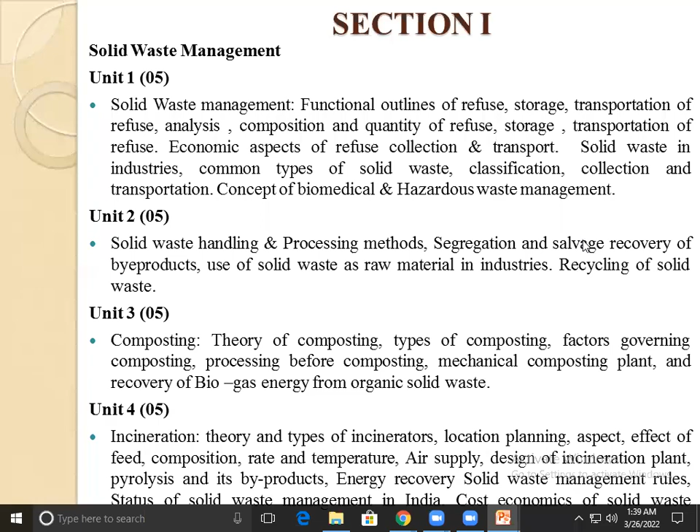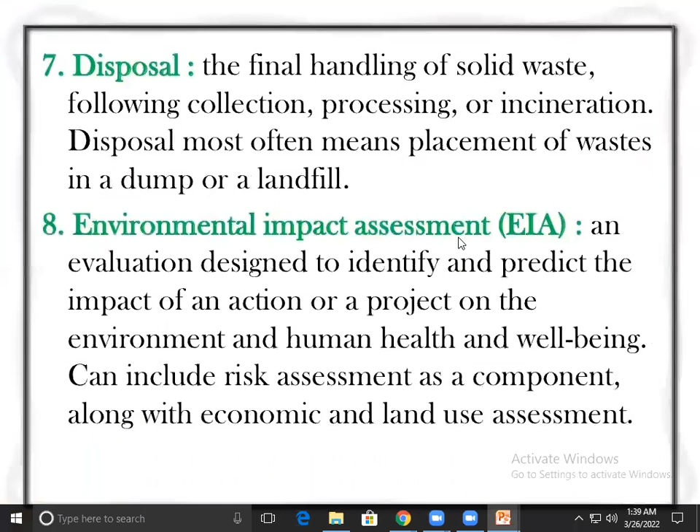In the previous lecture, we have seen the different collection methods and different factors affecting the methods of collection.

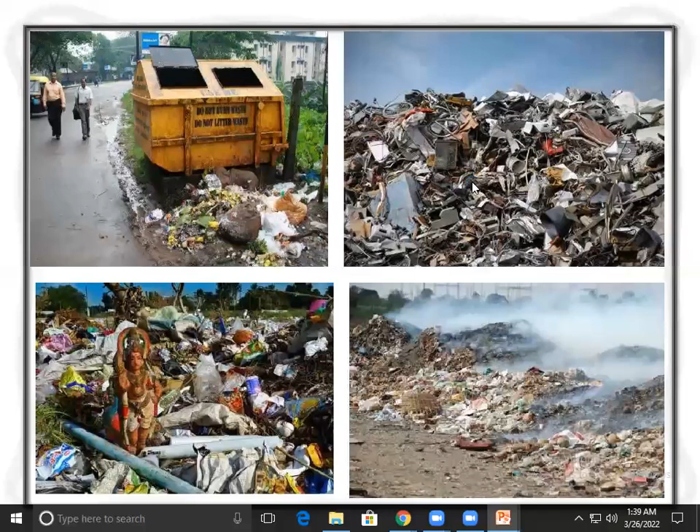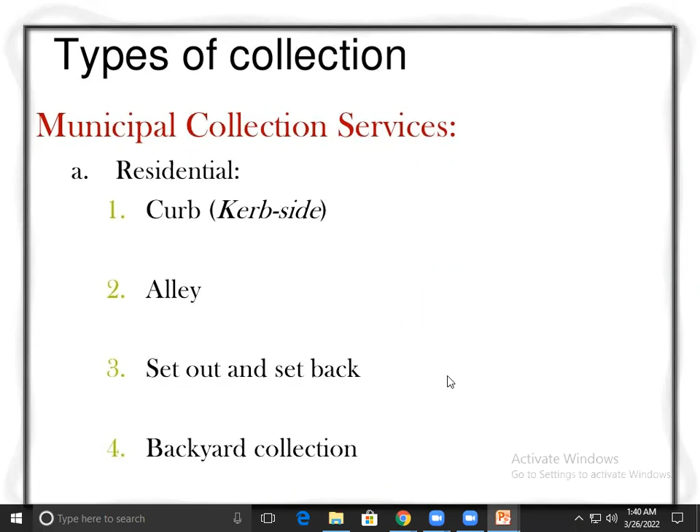Types of collection that include municipal collection services. In that, I have studied from the residential buildings how the solid waste is collected by different methods, near to the curb, alley line, set out and set back, backyard collection. These are the methods of collection in residential buildings, in commercial buildings and industrial buildings where waste is collected

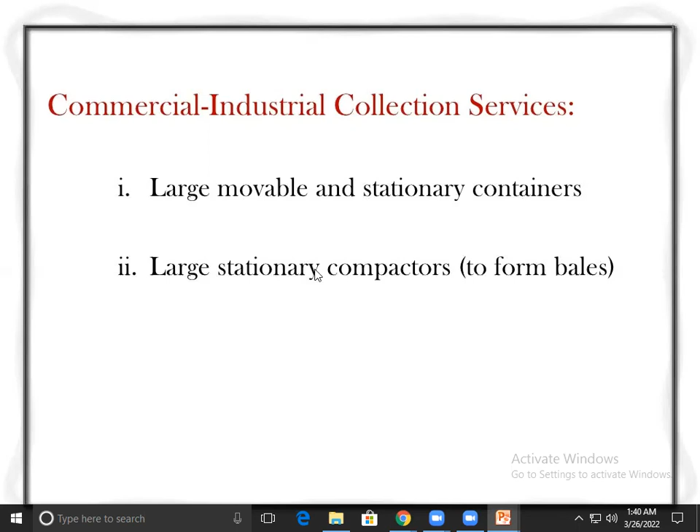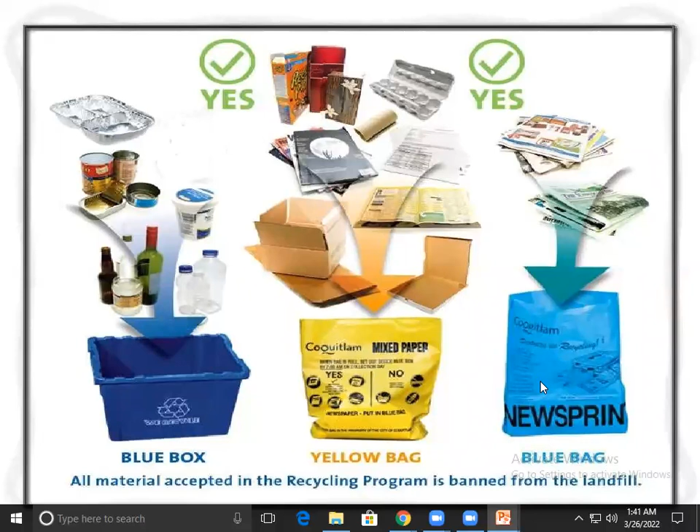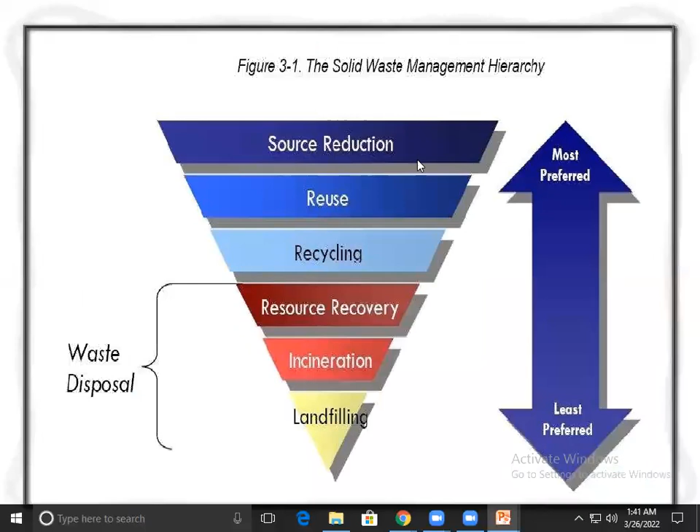In composting method, we have seen these three methods: composting by trenching, open windrow composting, mechanical composting.

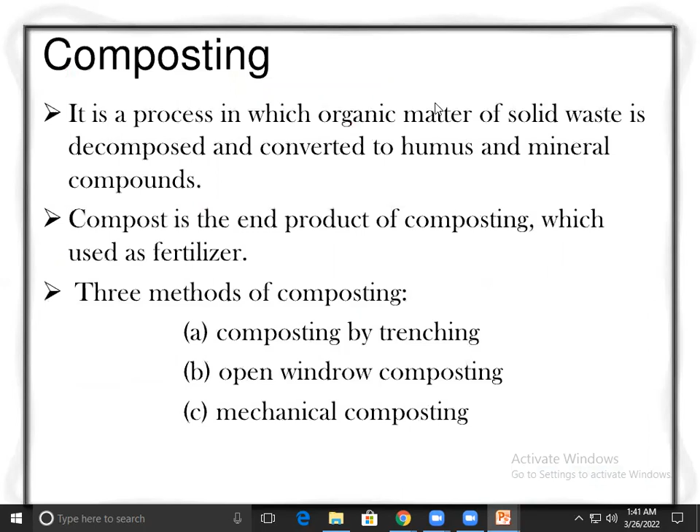Now second method is incineration. The treatment and disposal of solid waste includes composting, incineration, landfilling, pyrolysis, and recycling.

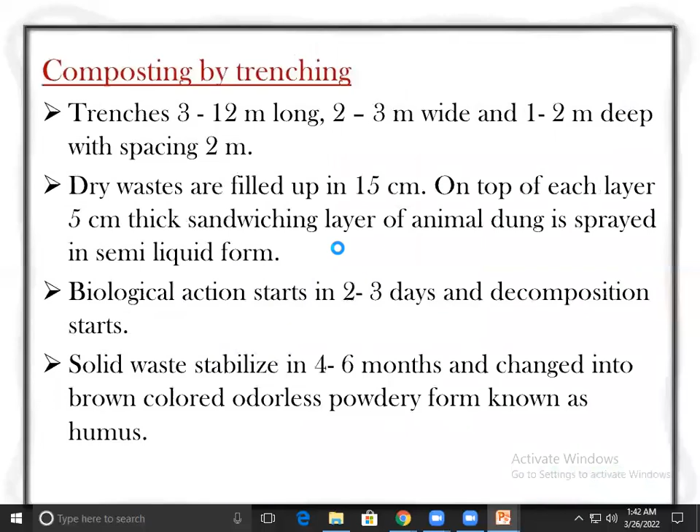We have seen composting. Now, incineration method. What does incineration mean? It means burning. Combustion - this process includes combustion of the organic substances, the organic waste which are generated from the residential houses and industrial buildings. That organic substance is burned into the incinerator.

Incinerator is used for this process, in which burning is done. Waste is burned into the incinerator. What is an incinerator? The equipment in which waste is burned into that chamber - that equipment which is used is called an incinerator.

Incineration of the waste material - that is converted into ash after burning. What it forms, the final product, is ash, flue gas, and heat. Steam is generated. What do we call this? Thermal treatment, thermal power.

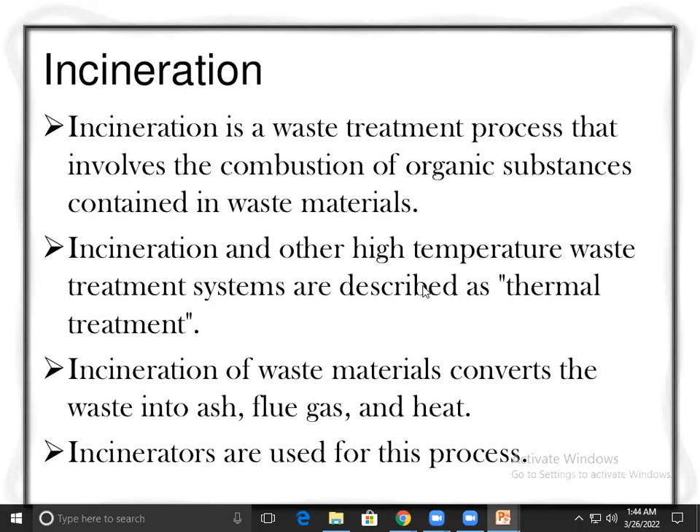Thermal means heat - heating treatment is given. At a high temperature, the waste is burned. This is the process of thermal treatment.

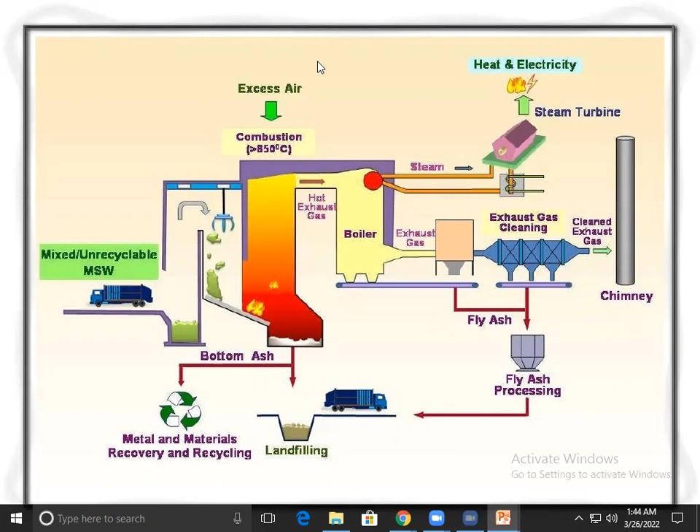This thermal treatment is for mixed and unrecyclable municipal solid waste which is dumped here. After dumping, the waste goes from here into this chamber.

Solid waste is collected in this combustion chamber. See, in green color, this waste is collected here. From here it is pushed into this chamber - the combustion chamber - in which the waste is heated at a temperature of more than 850 degrees Celsius.

Combustion is done with excess air. In this combustion chamber, heat is generated, as shown here. The temperature applied is kept above 850 degrees Celsius.

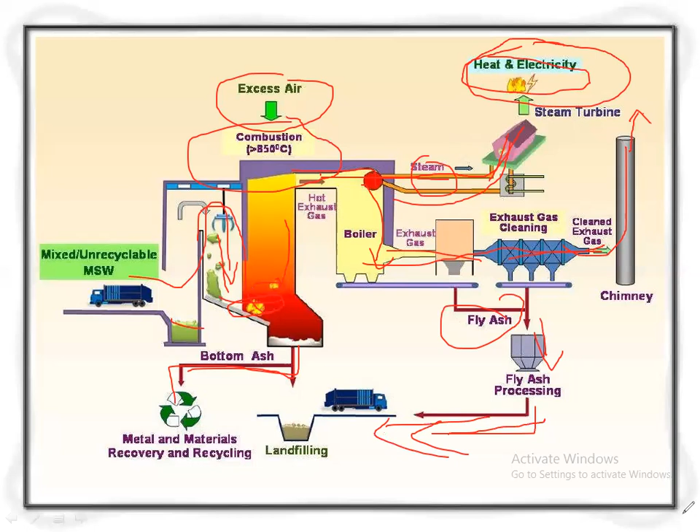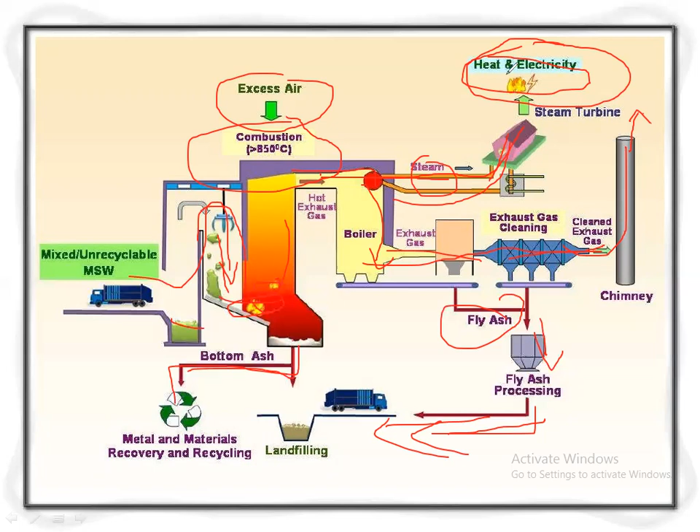Therefore, this incineration requires more units. Therefore, the initial cost will be more to install these machineries, equipment, and a large area is required. Therefore, it is costlier - a similar process, the incineration process.

What are the points considered in this incineration process? The solid waste should be supplied in the combustion chamber continuously, and the waste should be properly mixed with fuel for complete combustion.

It should be complete combustion. If it burns partially, what will happen? Air pollution will occur. It will mix with the air and release gases harmful to the environment and society. The temperature maintained should be above 850 degrees Celsius and should not be less than 670 degrees Celsius.

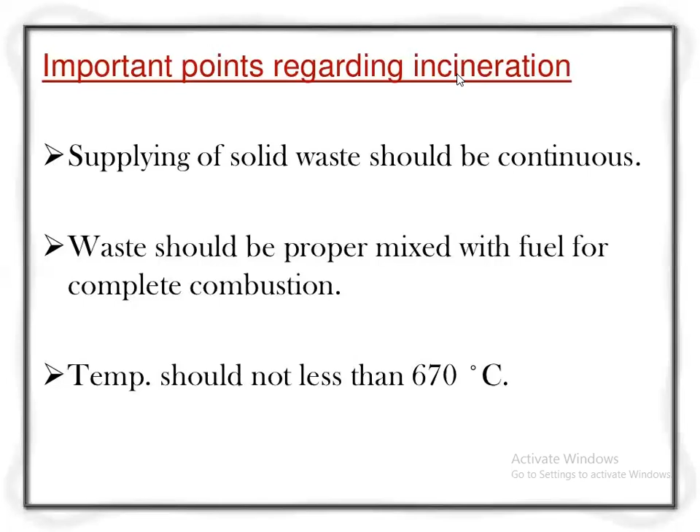What are the advantages in this? It is the most hygienic method. Why is it hygienic? Because all the waste is burned - whatever material is there, organic waste, combustible material, biodegradable, non-biodegradable, hazardous waste - it all completely burns. Whatever pathogenic bacteria are present get completely destroyed. Therefore, it improves the hygienic environment; hygienic conditions can be maintained.

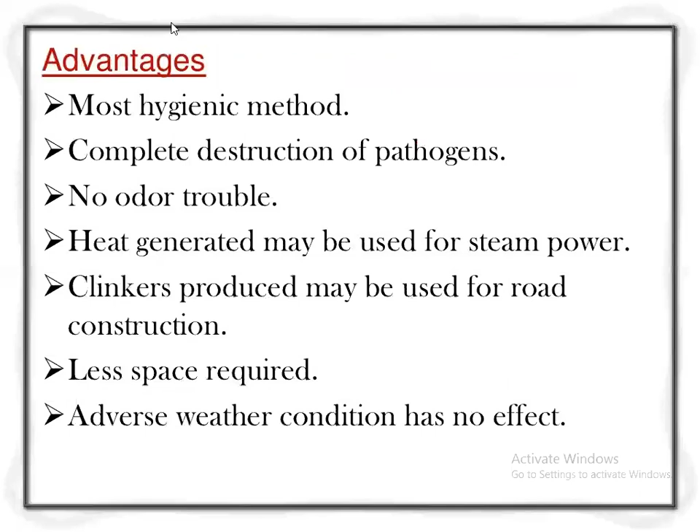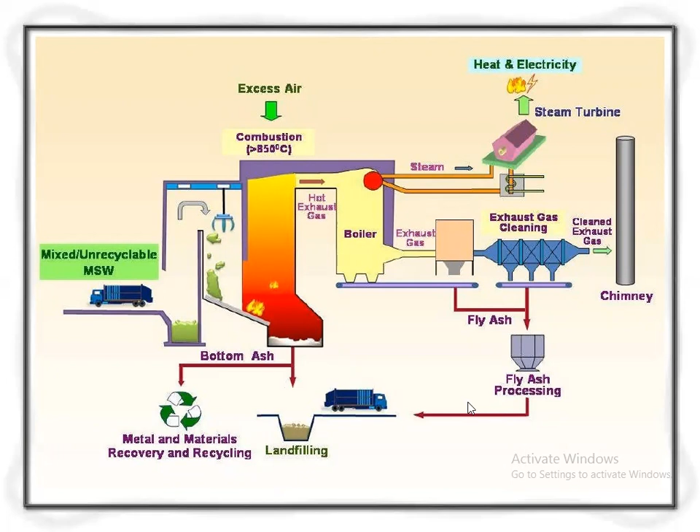Residue disposal is required, which requires money. The residues, as shown in the diagram - the fly ash residue needs to be carried, requiring transportation cost and vehicles, which will increase cost. Large numbers of vehicles are required for movement of the waste and fly ash, therefore transportation cost will increase. These are the disadvantages.

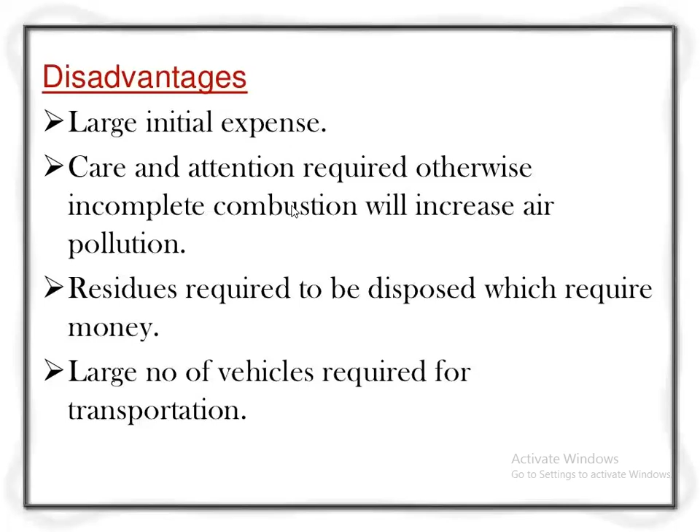This is one of the treatment methods - incineration. Did you understand the incineration method?

The next method is landfilling - one of the oldest methods, in which the waste is buried into the ground in trenches. Just like in composting, the waste is deposited layer by layer in trenches and then covered. In landfilling too, on the landfill site where the trench is, the trash, refuse, and garbage are dumped and laid in layers. In many countries all over the world, this oldest method of treatment is used.

Nowadays we use modern methods of treatment of waste. The dumping is done with layers of 1 to 2 meter depth. Each layer is covered with soil of 20 centimeter thickness - a soil layer is placed on top. Up to 1 to 2 meters, waste is dumped, then a soil layer is placed, and then solid waste is deposited again. It is laid in layers.

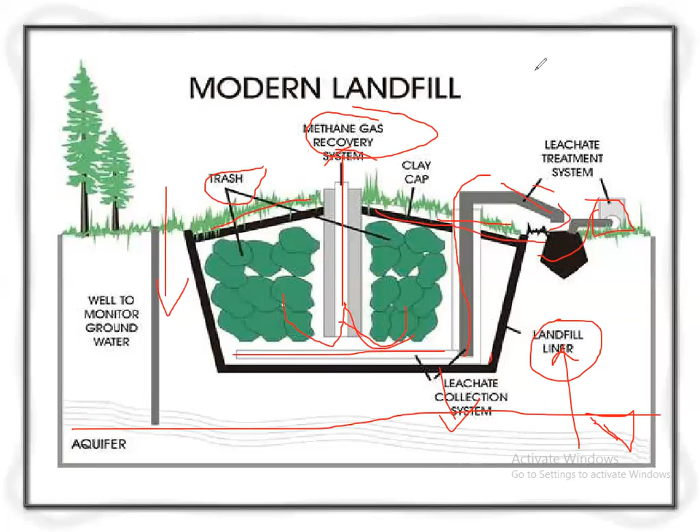What are the advantages of this landfilling method? The simple method than incineration. No costly plants are required. Only you have to excavate the trench. In that you have to place all these pipes, methane gas pipe, leachate system that you have to install, leachate treatment unit where you have to take.

No residues or byproducts need to be disposed. जसं incineration method मध्ये जे byproducts असतात, ash, that are need to be disposed of. त्यामध्ये कुठलेही रेसिड्यू जमा होत नाही, बाय प्रोडक्ट जमा होत नाही. Therefore it need not to be treated or disposed of.

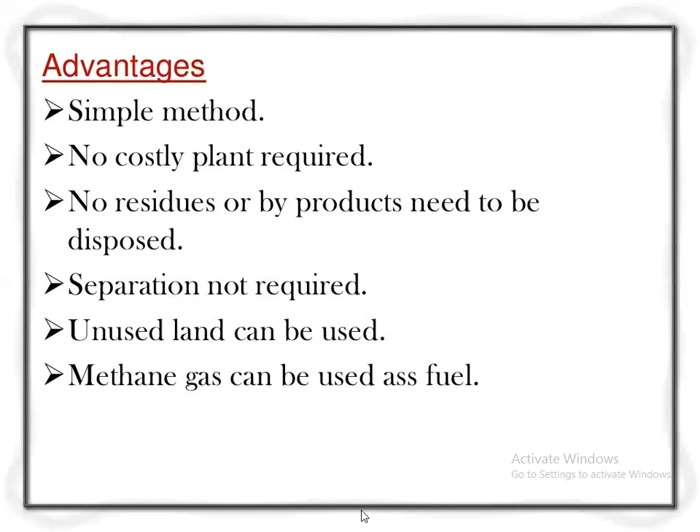Separation not required. Material separation है, solid waste it will not be separated. Separation is not required. Unused land can be used, जे unused land आहे, that can be used for the landfilling purpose. Methane gas can be used as fuel for cooking purpose. These are the advantages.

Disadvantages काय आहेत? Large land is required. सॉलिड वेस्ट डंप करण्यासाठी large area लागेल. Land area required will be large, and dumping site may not be available. जे डंप करण्यासाठी dumping site लागतात, so it will be available far from the villages or towns. Therefore transportation costs will increase. This is one of the disadvantage.

Odor problem will create. डम्पिंग केल्यानंतर त्यामध्ये मिथेन गॅस बाहेर पडतात, त्यामुळे it will spread in the society, in the nearby houses where landfilling is done. There will be chances of spreading diseases, spreading in the environment. It will pollute the air, air pollution may take place. Or due to leachate, it will create water pollution. Some insecticides are required. And methane gas should be collected properly, otherwise it may burn or create health related problems, greenhouse gas problems that may be created. These are the disadvantages.

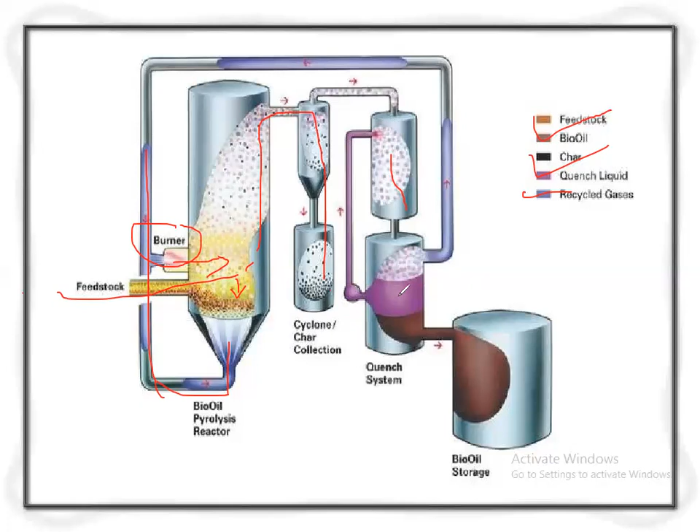चार्कोल fuel म्हणून यूज केलं जातं. आणि quench liquid that is formed, shown by this purple color, and it is taken to this bio oil storage system, that is used as a fuel. This is a quench system.

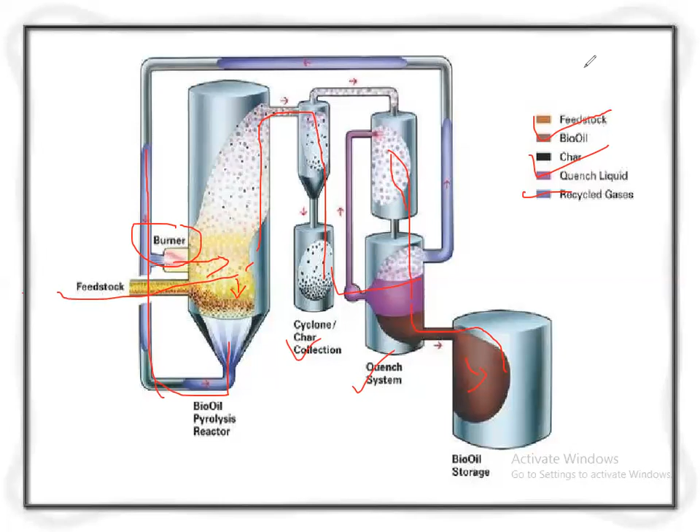तर या प्रोसेस मध्ये समजलं, जे feedstock आहे इथून सॉलिड वेस्ट या ऑफर मध्ये येते, त्याचं सॉलिड वेस्ट बर्निंग केलं जातं. It is heated at the temperature of, किती आहे टेम्परेचर? Heated at a temperature of about 500 degrees Celsius to 1000 degrees Celsius. त्या टेम्परेचर ला हीट केलं जातं. हिटिंग केल्यानंतर त्यामधून पुढे चार कलेक्शन केले जातात - charcoal is collected, and the bio oil that is collected in this bio oil storage unit, the quench system, and recycled gas that is taken out. This is a recycled gas.

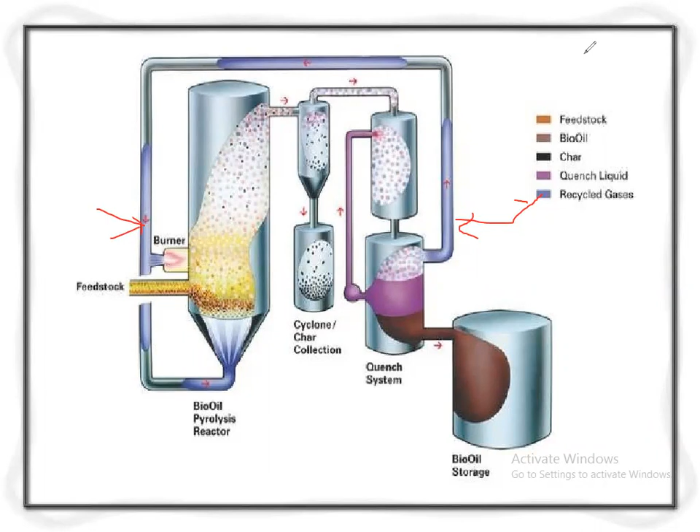So from this process, which byproducts are collected? Gas, recycled gas, liquid or bio oil, and charcoal or char. These are the byproducts obtained after this heating process, and these are taken out.

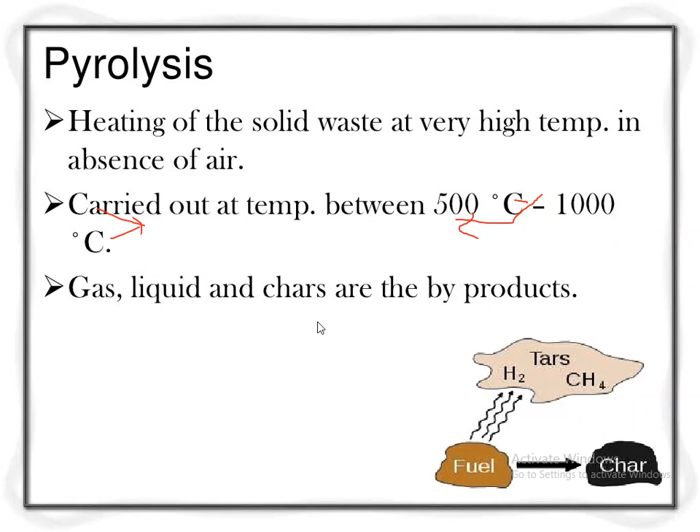Then the next and last method is recycling. The raw material, solid waste, is recycled after processing. Treatment is given to the solid waste, and after processing, new products are taken out. This reduces the consumption of fresh raw material after recycling.

Recycling reduces air pollution. Water pollution will not occur from land filling that may cause water pollution, and incineration that may cause air pollution. Due to recycling, this air pollution will be reduced. It also reduces energy usage and the consumption of fresh raw material.

These are the advantages of recycling.

This is the third component in the hierarchy of solid waste management. The first is reducing, second is reusing, and third is recycling. In the hierarchy of solid waste management, recycling is the third stage, the third component.

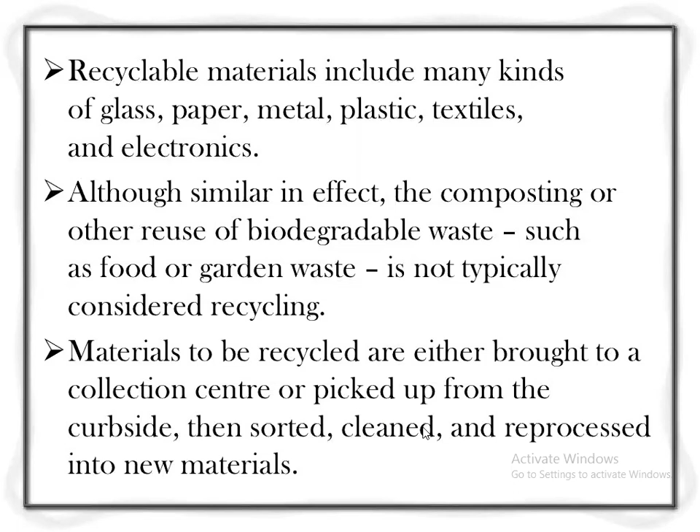In this recycling process, after separation of the waste, they are brought to the collection center where the waste is collected. This recycled waste is cleaned, sorted out, and separated - glass is separated, paper is separated, metals, plastics, textile material, electronic equipment are sorted, and the materials are cleaned and reprocessed into new material.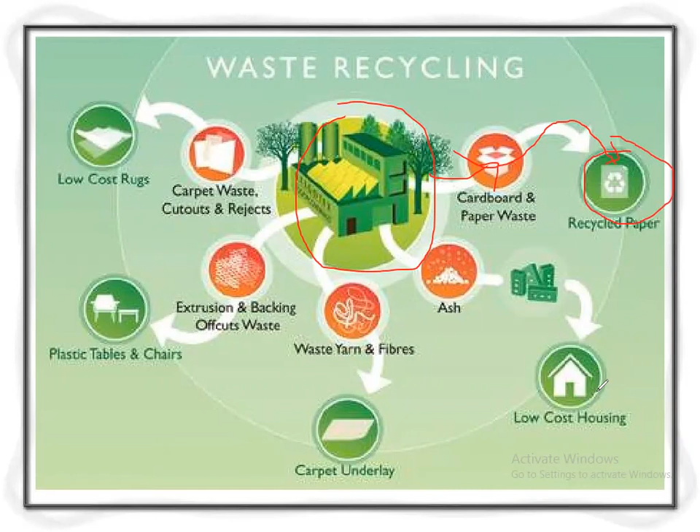The recycled papers are processed. After processing the recycled papers, combustion takes place and ash is formed. This ash, after processing, is used in construction industries for making different building materials.

We use it as fly ash, used in construction. In the construction industry, the ash is used, for example in fly ash bricks.

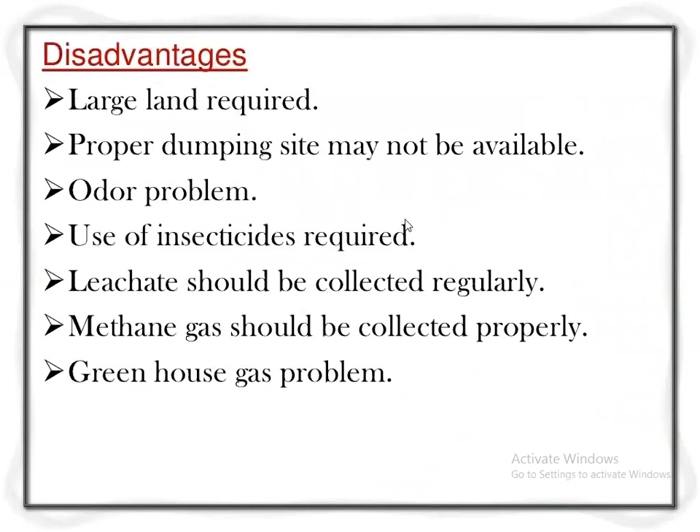Treatment methods and disposal of solid waste - we have seen composting, incineration, landfilling, pyrolysis and recycling. These are the treatment methods and disposal methods of solid waste.

Any one method may be asked in the exam, like composting - you have to write in detail with a sketch what is composting, what is the procedure, what is the process. Incineration, landfilling, pyrolysis, recycling - you should write these in detail. For this, any one method may be asked in the exam for 4 to 6 marks.